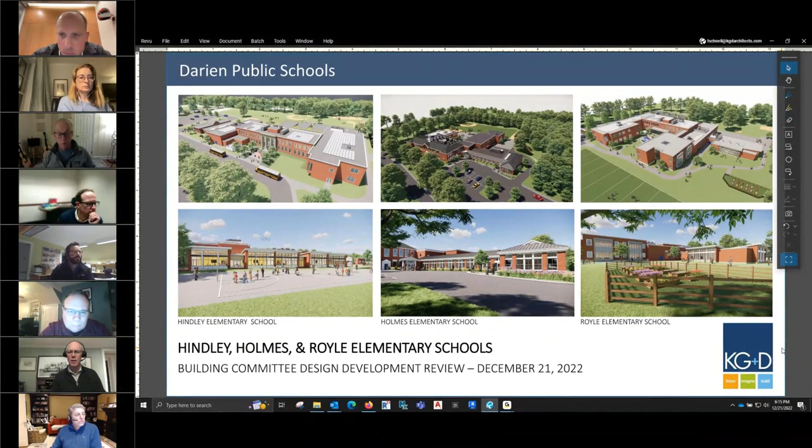Okay, Travis has controls, but I'll do a bunch of the speaking here. We spent the last three weeks doing cost estimating, as mentioned, with the two sets of cost estimators. They worked really hard. We got together late last week and reconciled those numbers, which means we looked at each line item, went down the list, made sure both estimators were looking at the same project and that the numbers were relatively consistent. We're not looking for identical numbers, just looking to understand where both are.

In terms of the agenda, the first topic will be the budget discussion. When we're done with that, we'll go into the stormwater discussion, review some of the exterior design issues and modifications that may be considered, and the interior design work, which we shared with the district yesterday and went through, giving an overview of that, and finally next steps. In terms of action for the committee this evening, we want to confirm the direction for the stormwater design and approve the process to proceed with our construction documents.

In terms of the three phases of design, we completed the schematic design, we just finished the design development stage, and the next stage is the construction documents. With the completion of the construction documents, that's when we'll have a set of drawings and a specification that can go up to the state for permit and go out to bid for construction.

So the first part is the budget discussion. If you can go to the next slide. Dave, I'll tee this up and then turn it over to you, and you can go into any level of detail that you think we should be sharing.

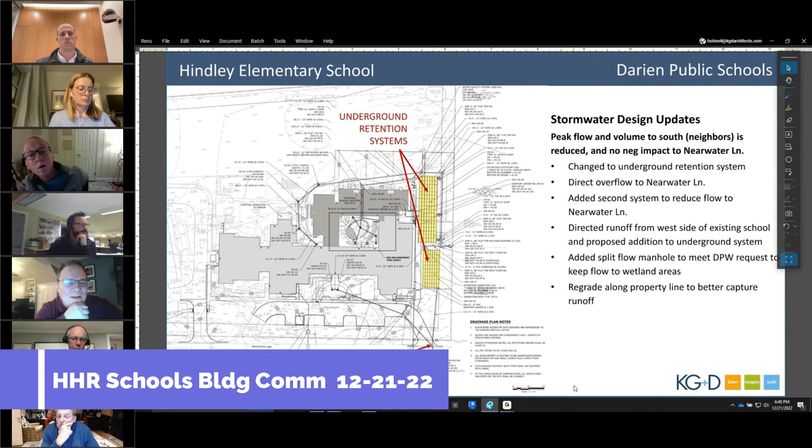So that splitter manhole, what it does, the low flow from small storms will continue going to the south. But in heavier storms, the water rises inside that manhole and then discharges to the west towards Nearwater. What we had to do, one of the requests from DPW, was to not increase the flow to Nearwater.

So we had to include a second detention system in the design. It's a chamber system, a little bit smaller than the upper one, roughly half the size, also made up of smaller chambers as well. That reduces the peak flow headed towards Nearwater to at or below existing conditions for the 2, 10, 25, 50, 100-year storms. So we're actually reducing peak flow in both directions, to Nearwater and to the south to Hindley.

So there is a flood attenuation on the site. We'll be discharging less flow and volume in the future than we are today in both directions.

We're also doing some regrading along the property line. It doesn't show up too well, but if you look at that upper box immediately to the right, there are some catch basins there that we're regrading so they capture more stormwater. Based on some of the videos we saw from the Hindley neighbors, it looks like there's some bypass there, and looking at the grading plan, it does get around those catch basins and overflows on the adjacent property. Here, we're proposing some subtle grading changes, which will better capture that water and direct it into the underground system.

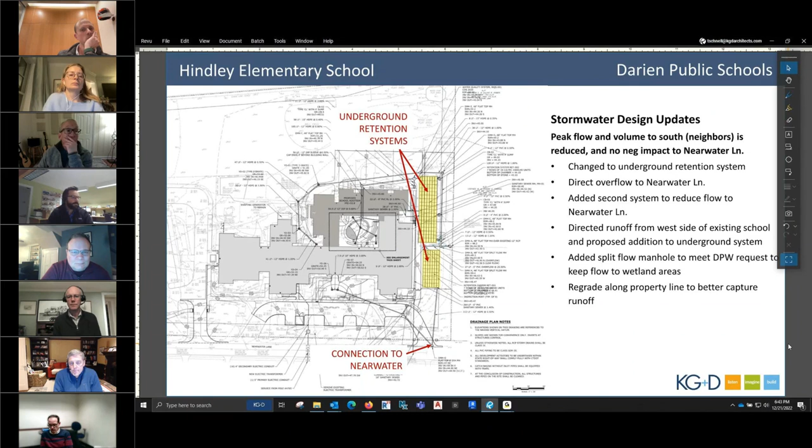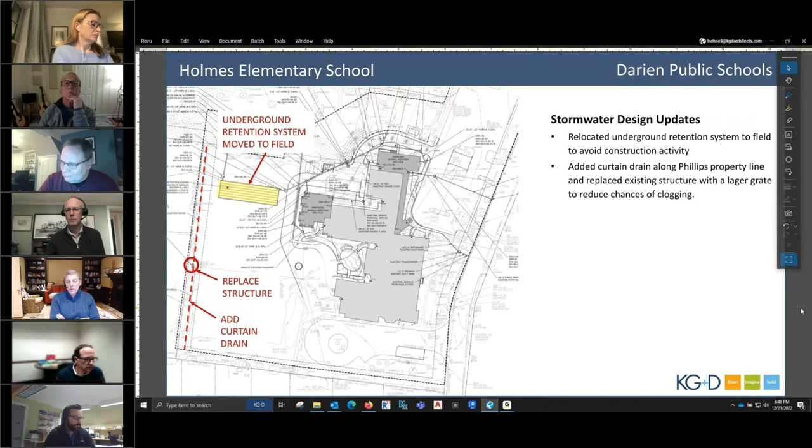So this next discussion is on the exterior, and we're not going into great detail. It's just areas of interest that have either been modified or are discussion points that the Architectural Review Board has brought to our attention. Next slide.

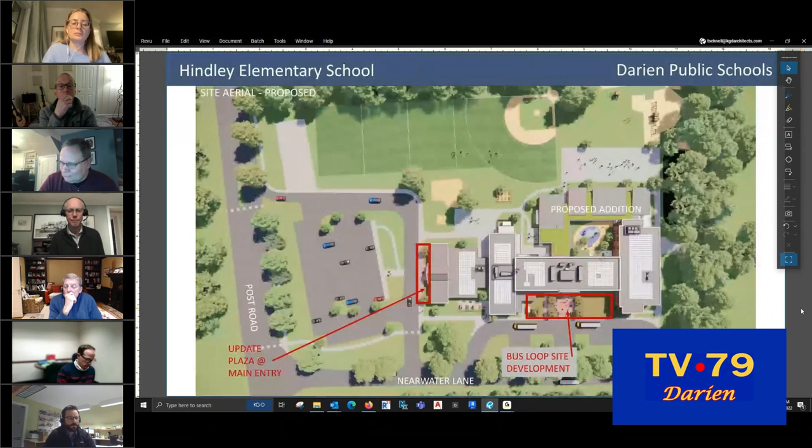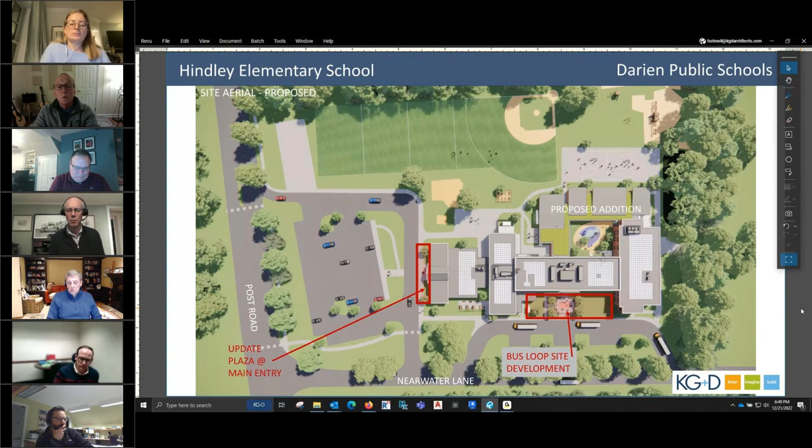So the ARB has asked us to look at the two entrances, our main entrance, which is on the left, and the bus loop access point, which is down at the bottom where the existing library is. Next slide.

So in response to ARB comments, our landscape architects have looked at the front of Hindley and provided a whole landscape plan associated with the green space to the left and to the right of the main entrance, as well as all the hardscape, the sidewalks and the entrance area in front of the building. So currently you can see that the sidewalk today is asphalt and has a concrete section right in the middle. The proposal in the future is the entire sidewalk will be a new concrete sidewalk. And then there's an inlay in the middle - you can see a sort of a reddish square in the middle there. That's planned to be a brick paver inlay into that. And then there's benches that are part of this. We're reusing the existing pear trees, they're to stay, but there's a whole additional set of plantings that are planned in the beds to the left and to the right.

We did present this to the Architectural Review Board. I think their response was lukewarm - I'm not sure they feel that this entrance is strong enough for the school, which I'm not sure we agree with. We think that this is a very nice entrance, it's appropriate for the age group. I think it's something that at the building committee level or perhaps the design committee level we should continue to discuss as to whether or not we want to do anything more with this, or this is as far as we're going. As far as the plan scope of work and the ed specifications, this is the level of detail that would have been expected. A greater level of detail is beyond the base ed specifications that were provided for this project.

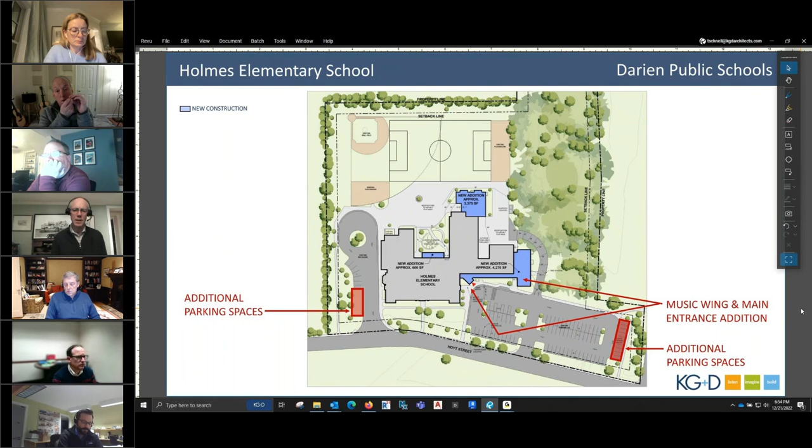So this was the most recent update. This is the addition that shows on the right, referring to the larger top rendered view here. On the right is the new music wing addition. In the middle is the connecting corridor that leads from the lobby to that music addition, and on the left is the new entrance pavilion and vestibule.

That vestibule, by pulling it out, reaches out to the students when they get dropped off in inclement weather. It's easy to go straight from that covered entrance area directly to your car without getting too wet. It also creates a clear pathway from the rest of the building to the music wing and back and forth without having that security vestibule in the way. That security vestibule also leads directly to the welcome desk straight ahead, so there's visual contact between that welcome desk and this vestibule, which is fairly important.

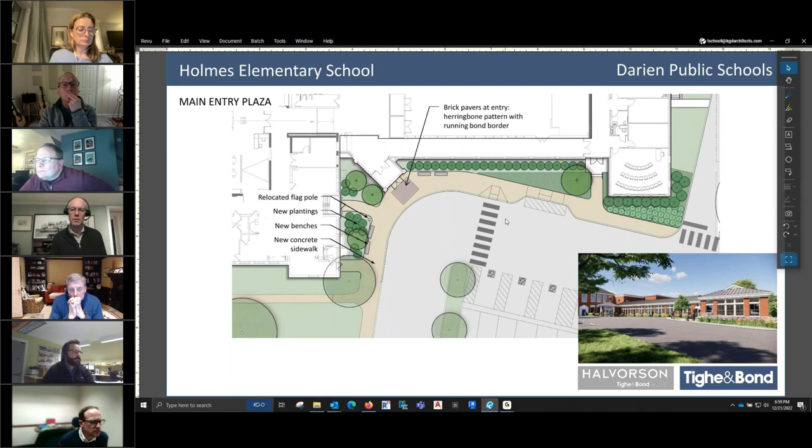Again, I think there was a discussion at the planning and zoning level as to whether or not we would want to construct both parking areas at the same time, or do one of them potentially as an alternate. If we need that additional parking, we have the designs in place and could construct it at that point. Next slide.

One other comment the Architectural Review Board stated is that they were hoping we would address all three main entrances and bring the exterior appearance up a level, since we're doing so much work in the rest of the building. Our architectural charge was not to address the outside of the main entrance, but if this is something the committee or board would be interested in, we could look at this entrance in terms of a different architectural expression on the facade.

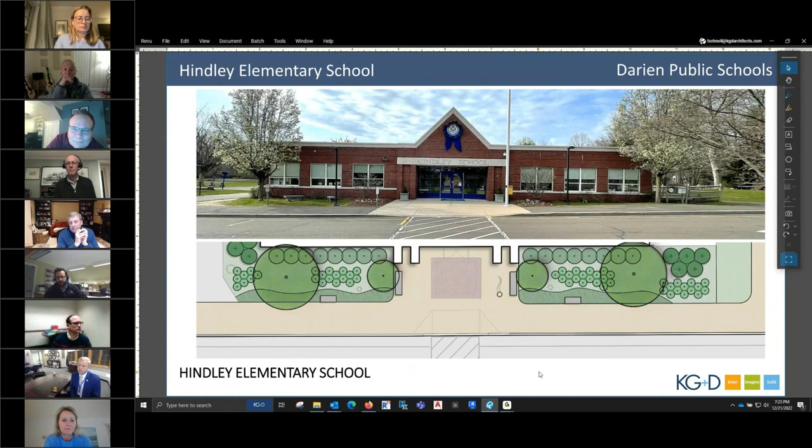I also think, just for supervision and security, it's not the best design, personally. But—

We weren't advocating for it, we were just using this as a point of discussion. So this discussion is excellent, because those are the types of points that when we go back in front of the ARB and say we're doing this for this reason, we're going to quote the points made right here.

So thank you. Thoughts from any other committee members? I know we have to approve these holistically, but thoughts from the committee members on this point?

Hey Chris, it's Jameson. I was just going to say that Eric made a point about it being alternates, possibly. To me, I think that's the best case scenario at this point, to have it as an alternate to change the facades that the ARB is asking for, if we have budget, time, and capacity as the project goes on. I think we've made so much progress on these decisions already that it's kind of silly to go backward when we're already trying to move this whole thing forward and have made good designs everybody agrees on. So I'd say continue moving forward as we were. Alternate would be the option.

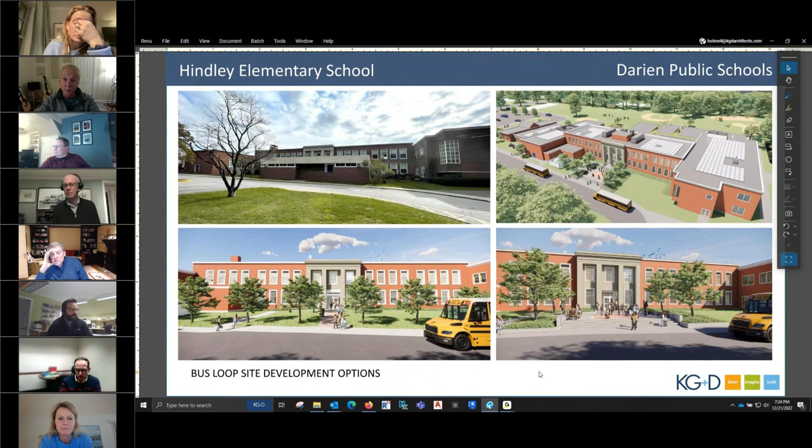Dave Martin, you were going to say something? Yeah, I like the current design for the Holmes project with the pitched roof. I think it makes it fit into the neighborhood better than the straight vertical face from the first go-round. So I'd stay with the pitched roof and the entry that's been designed here. I like it, I think it's the nicest one I've seen.

On the Royle entrance, I would love to see Eric and his team come up with some ideas to spiff that up a little, to make it more consistent with these two schools, to the extent we can without blowing the budget. At least come up with some ideas for it within what they believe is appropriate. On the Hindley one, I'm going to defer to Dr. Addley and the educational folks. They like doing the courtyard on that side by the bus entry, so I'd stick with that unless our hand gets forced to do something different.

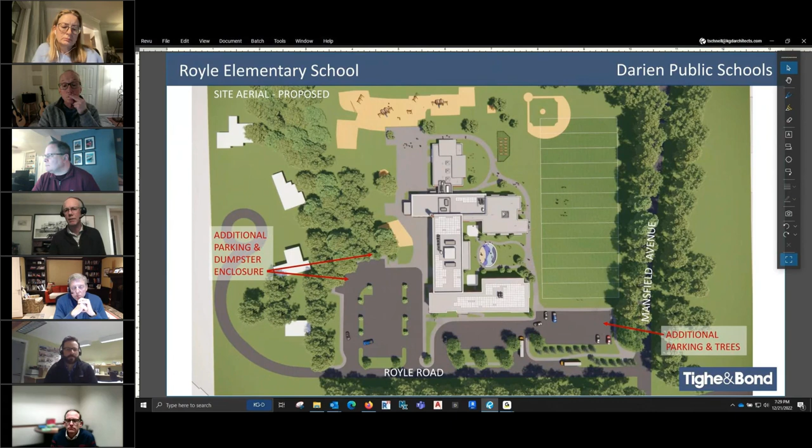Can you go to the elevation, Travis? The photograph—yeah, that one.

For example, if we were to put cast stone—if you're looking at the photograph with the blue doors and blue canopy—if that area and the two windows above, that whole box area, was done in cast stone, and that canopy was taken out and we did a nicer canopy, and put some better landscaping to the left and right, that's what we can do to make sure the front entrance is better defined and a stronger statement.

That's the type of thing that—Dave, you'd have to answer this—I think we could do over the summer, the second summer, and get that done. We'd just need to make sure we bid it out well in advance so we had enough time to get the canopy constructed and all the material on campus.

But it's in a separate area, so there's no reason we couldn't do that work at the same time as we're finishing work elsewhere, when school is not in session.

I don't know how that works with state submissions. I guess if you're not getting reimbursed on this, it might not matter, because for them to consider anything, it has to be a fully realized alternate. It wouldn't even be bid out—it would just be a change. You would issue a PR saying add this scope.

We would price it, and you say yes, go ahead with the change, or we don't go ahead with the change. Listen, we can try to submit it as an eligible cost and see what OSCG&R says. If we can make some argument for better security or safety, you can try, but how long it would take to build really just depends on what the scope of the work is.

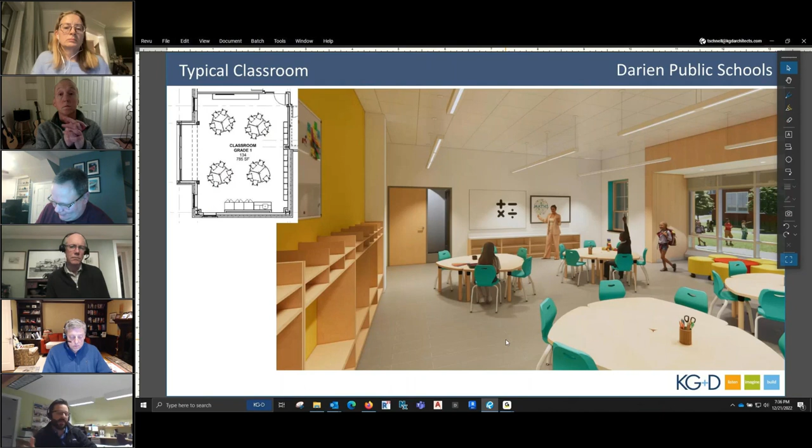Here's another view showing the teaching wall, and we're having discussions with the principals. We're having a follow-up discussion with staff on the 10th of January, when we'll review this one more time with both principals, Dr. Addley, who wasn't available the other day, and the individual librarians, music teachers, and art teachers.

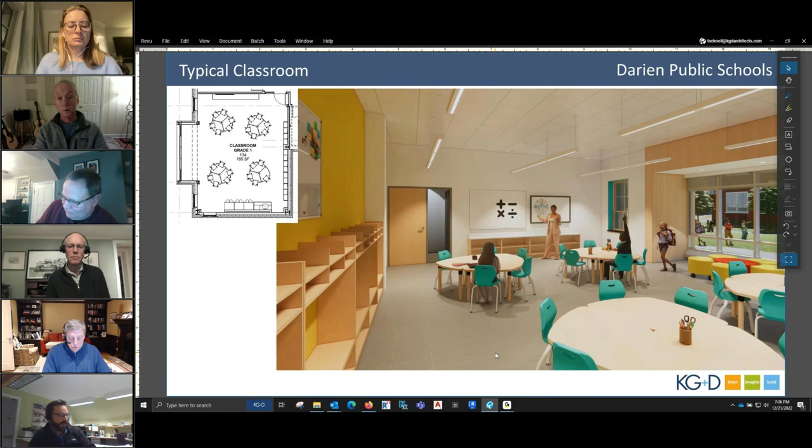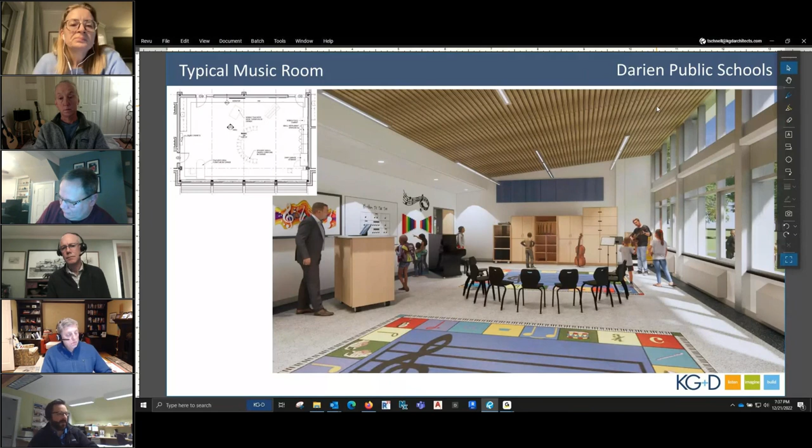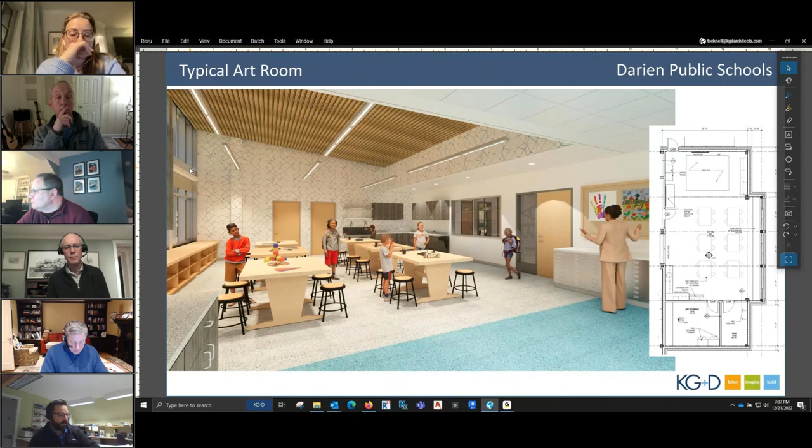And then for the Learning Commons, we did 3 different layouts, 3 different color palettes, I should say, so the principals and decision makers had options to pick and choose from, whether they wanted them to be different amongst the different libraries, or pull elements together and incorporate those throughout.

And so again, you have your acoustic metal wood look ceiling, carpeting, carpet tiles on the floor, easily replaceable, a lot of movable storage bins. We're accommodating the volumes of books per conversations with the librarians. We have our reception desk here and some built-in storage along the wall with separate zones that were, again, dictated when we met with the librarians, whether there's small breakout zones, small group instructional zones, reading nooks, and green rooms for filming and recording.

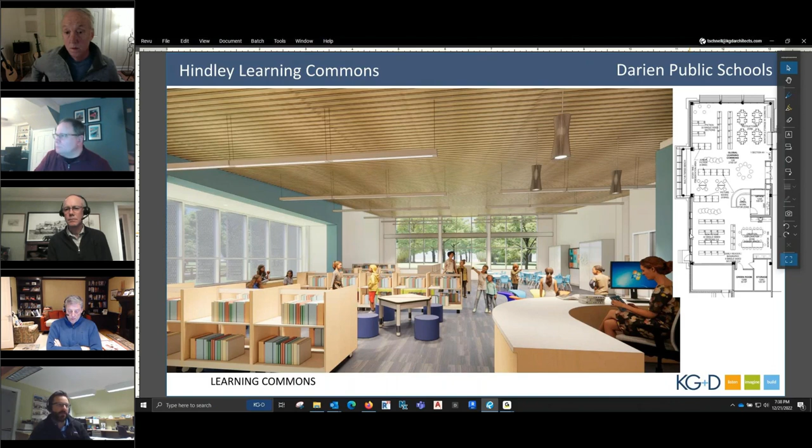Here we have Holmes where we have the new bump out over here overlooking the courtyard, and these also have separate little program nooks for story time and browsing. And again, the room is also separated into different age groups for where the books are located.

This is showing some wood trim along the wall, and a feature wall where we have an opportunity to show a large graphic.

And here you see this is a separate breakout room over here where you have these acoustic kind of separation panels, so you can slide these into the space and then have your own separate area apart from the rest of the library, and then open it up when you need larger groups.

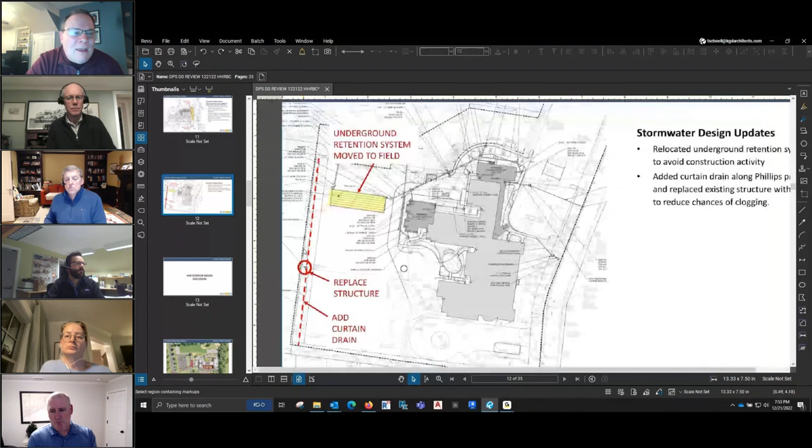To answer your question, the proposed curtain drain along the western edge of that soccer field will discharge into the catch basin that's there now. But as a reminder, that catch basin does get replaced with a new structure. And then from there, it drains back east, to an existing manhole in the center of the Holmes site, and then discharges to the north. So we're maintaining the same drainage pattern.

Okay, so only the new parking lot and the new building go into the dry wells? Right, that's correct. Only the building additions and the new parking lot go into the northern stormwater chamber system there that you see in yellow. Thank you.

Any other comments? Okay, then with that, what we need to do as a committee, as we said at the very beginning of this long meeting, is take action to authorize the design team to proceed with the construction drawings, and confirm that we are satisfied with the design development drawings as presented to us this evening for purposes of presenting those to the Board of Education.